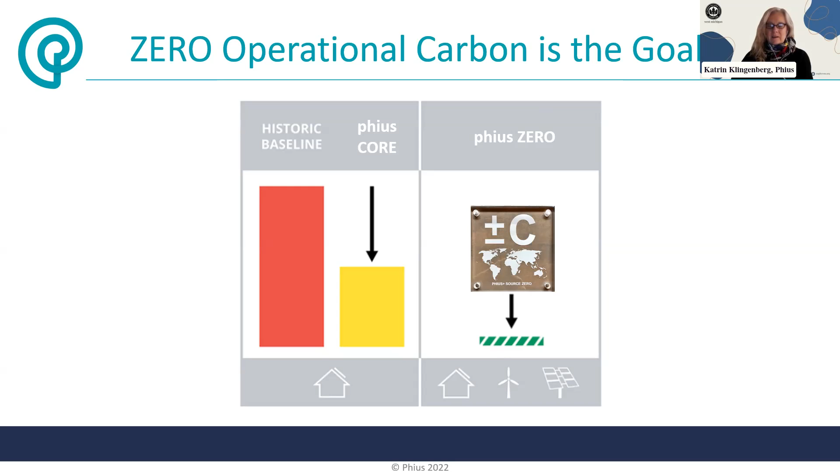So then under the Phius Zero certification program, we encourage you as the design team, obviously not just to go to zero, but the goal is to zero out the carbon. To do that, you'll probably have a safe kind of cushion in terms of sizing your renewable energy, and you essentially become positive energy and start drawing down carbon on that end as well. This little green stripy indicates you're actually overproducing.

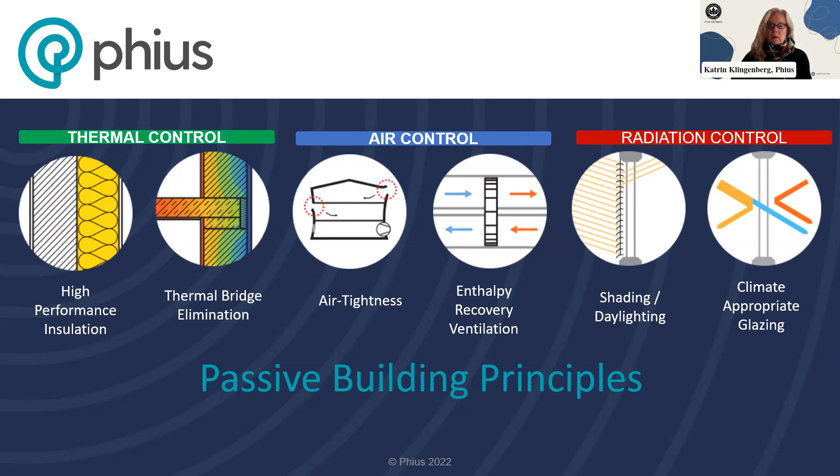And the passive building principles are pretty straightforward, this is not rocket science. This is thermal control for the envelope: insulation and thermal bridging need to be dealt with, air control so that we don't have any condensation in the wall assemblies. Cold climates like the one in Michigan, that's a real concern. Once you up your insulation levels, we want to build the building shell itself airtight, but then of course we need high quality ventilation with filtration, and also with energy recovery, and we have then radiation. Shading is very important, daylighting is important, and the performance of the window package is important, and that all depends on the climate that you're in.

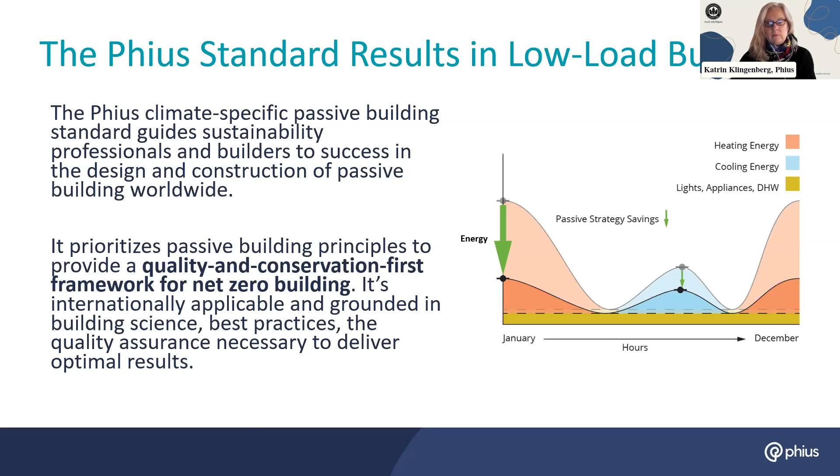So some of the additional upfront costs, especially in big buildings, is then significantly offset by the reduction of the mechanical system. And once we put all this in place, then we get a building that delivers all these wonderful benefits like comfort and healthy interiors, safety, resilience, durability, and long-term affordability.

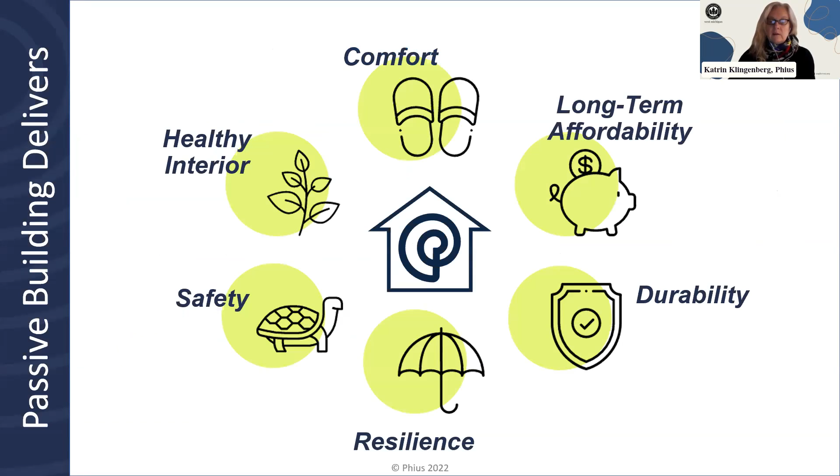So really kind of like pretty magic and not that hard to do. So let's hop into our certification process.

As I mentioned, we started working with the US Department quite a while back in developing our standards to cost optimize them, to incorporate very stringent QA/QC quality assurance during the construction process. And these are really all the energy programs in the US that do that in the way DOE says it should be done, including very stringent quality assurance on site as well, not just design certification.

So what's the difference between Zero Energy Ready Home and Phius Core and Phius Zero? Why is there differentiation? The Department of Energy decided Zero Energy Ready homes are cost effective, so they hold off on the envelope upgrades quite a bit earlier than we do, because they say there will be decarbonization in the grid, and that will be just fine and good enough. But in our opinion, this is actually not going to be enough, because we're already behind the curve on climate action, and buildings really want to go to zero because as climate change is already in effect, more and more attention is shifting to adaptation and resilience as well.

So to make your building really truly resilient, we actually envision cities to be built around this concept, combined with microgrids to further make the overall grid resilient as well.

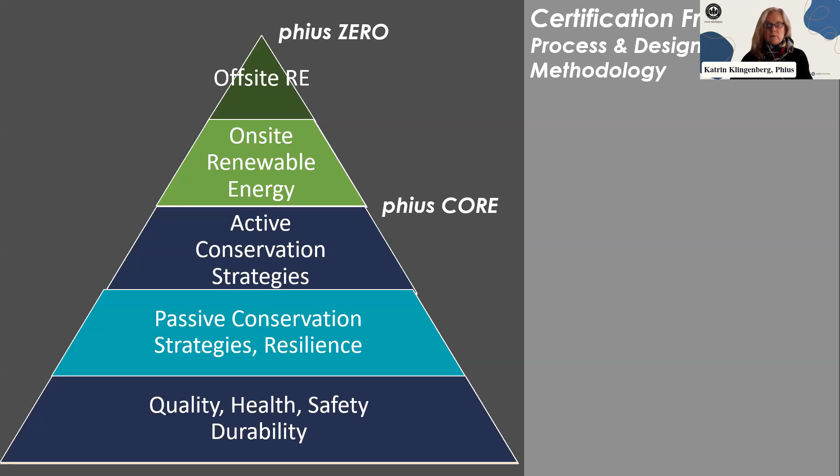And ILFI, for example, or LEED, they don't have that built in. You really should be doing this optimization process, because otherwise you're kind of reinventing the wheel. So going through the certification process with us is really going to help you streamline and make sure that you're hitting all the important points and that you actually meet the performance you're shooting for.

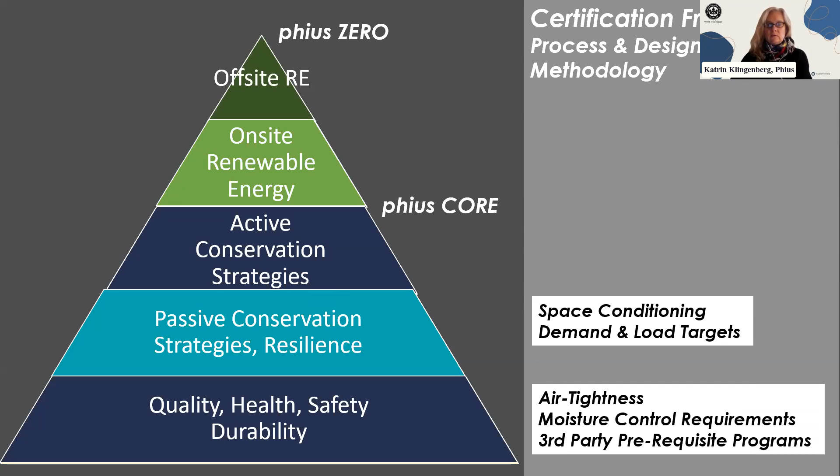So in the certification process, as I mentioned, quality, health, safety, durability is absolutely number one importance. And then on top of that, we lay out the passive conservation strategies to get to our resilience goals. And that means we can float through power outages, that's how good the envelope becomes. So snowfall in Michigan, maybe the power goes out, you can stay in your home.

And then after you put the passive conservation strategies in place, the next step is to optimize your active system. So you want to find electrification technology that is super efficient, like heat pumps with a very high COP, and that will get you to the level we expect for the Phius Core certification. Once you go above and beyond from there, that takes you to the Phius Zero certification. At that point, you're adding the appropriate amount of on-site renewable energy, but that's not always possible, so off-site renewable energy is also allowed under our certification process.

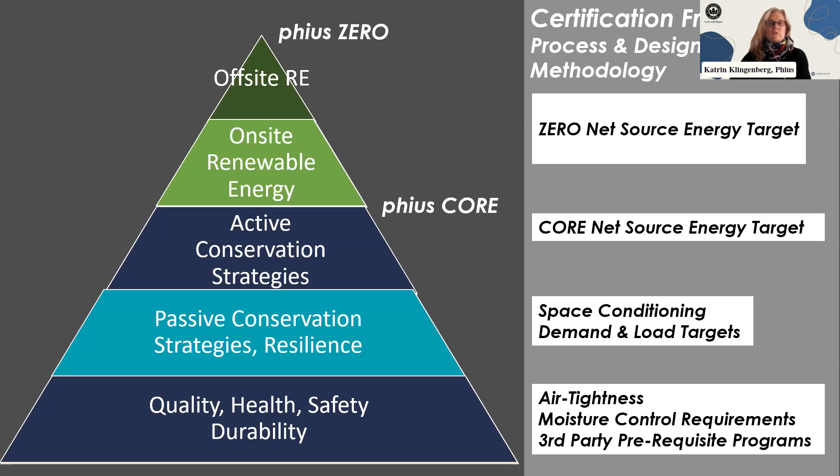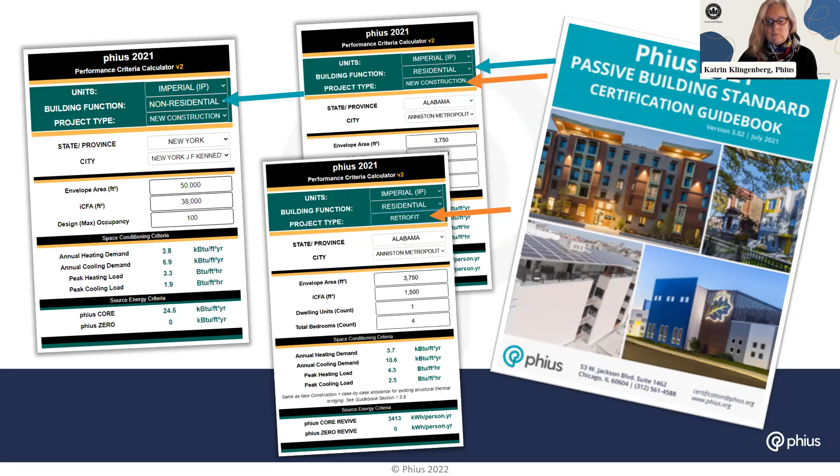So in this next one over here, the residential retrofit one, you can see that with a different size of building, these targets pretty significantly change. So this is very detailed and very optimized, and again, we're aiming to get you to the most cost-effective and most comfortable solution with this process.

Under 2021, we update our standards every 3 years because we basically have committed to the fact that climate is changing and costs are changing, and we want to hit the sweet spot.

That means we have to revisit our assumptions every 3 years, and we've done this ever since 2015. We're now on 2021, and you can see here that we're moving very clearly in the direction of zero energy and wholly electrified buildings.

For our Phius Zero certification, and we also recently came out with a Phius Core prescriptive where you don't have to do detailed energy modeling anymore. That makes it more cost effective and easier for people to do. It's basically just a checklist.

For those certifications, we're no longer allowing fossil fuel combustion. If you just go to essentially zero energy ready, the Phius Core level, at that point we're still allowing for combustion, but we ask you to consider that probably in the next 10 years you will want to electrify, because people will potentially decommission gas. So we ask for a plan so that electrification can be achieved easily later.

I'm going to check my time here real quick. I've got to speed up a little bit.

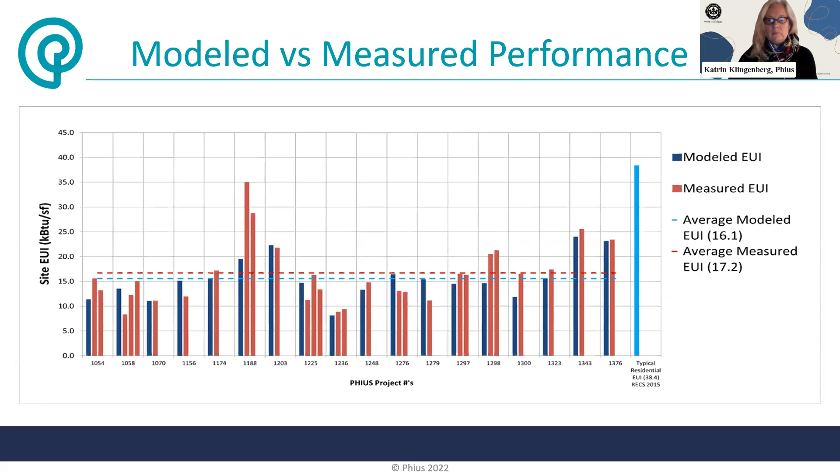Our measured results versus model performance are excellent. We're within ±7%, and we attribute that to very stringent quality assurance that I mentioned earlier during the construction process. And just a quick note on cost.

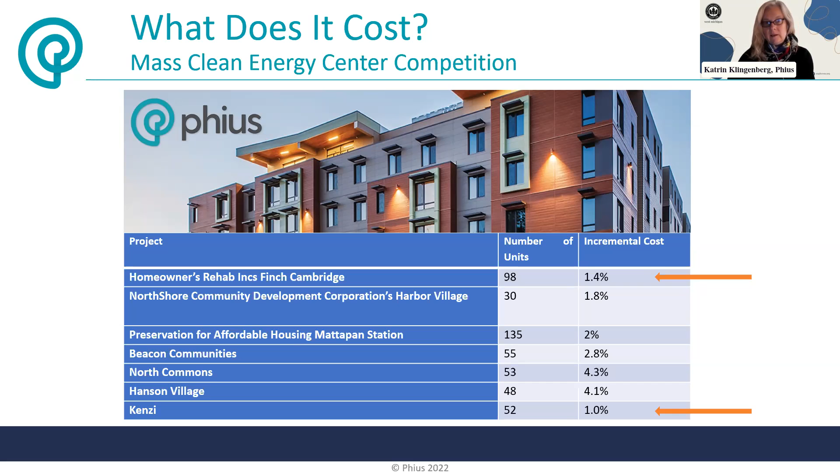And for a large multifamily building, at that point the developer really cannot afford not to do it. A lot of this is driven by affordable multifamily housing right now, because there's very hefty qualified allocation plan incentivization that's been written into 17 states across the country.

This is our largest to date fully certified project, an affordable 26-story project in the Bronx. We just had the big ribbon cutting, the governor was there, so pretty big deal. A very nice project, and there are many more to come in the near future.

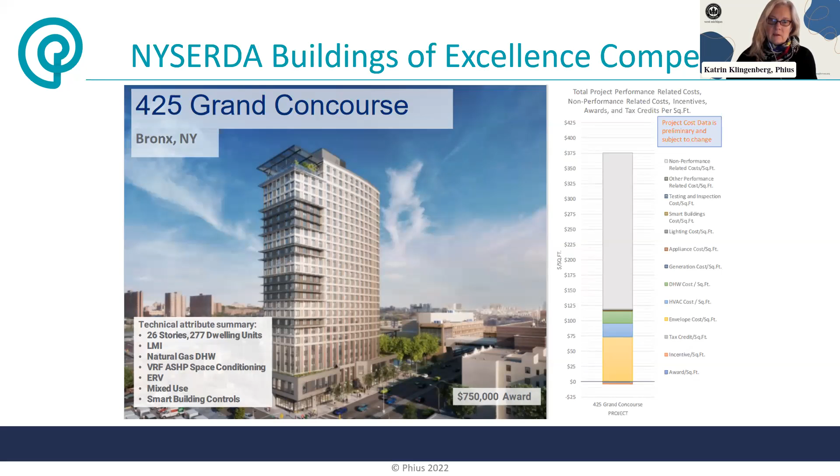Another one in the Bronx. In New York, they're really going for it.

Real quick, what we initially saw in single family homes in terms of detailing, air barrier, continuous insulation, and thermal bridge-free detailing, that translates really well to multifamily projects. It's not adding too much more cost.

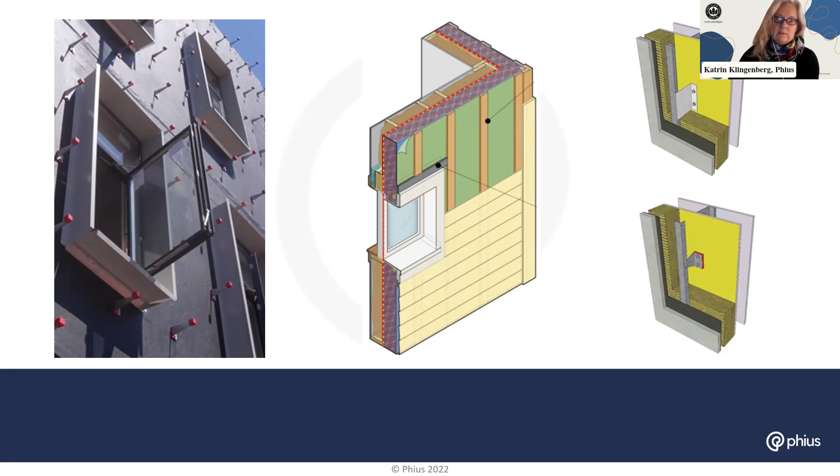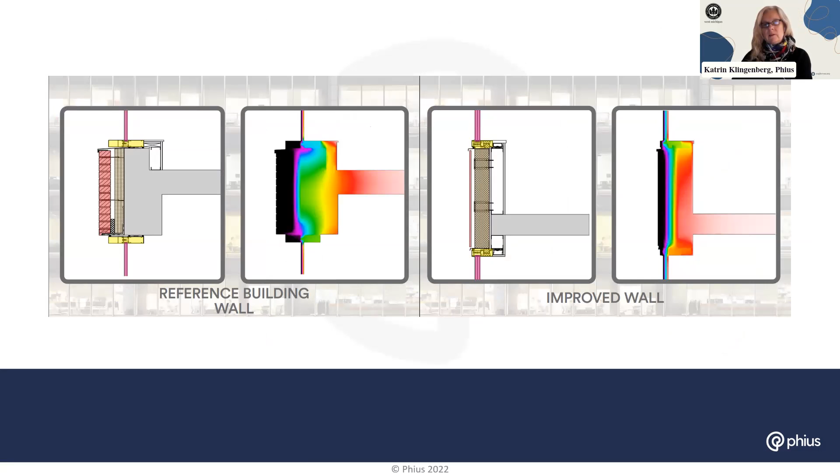And then also for commercial buildings, this is the detailing here, like a typical reference building wall for an office building in Chicago that was designed by Solomon Cordwell Buenz, and they improved the details on the right to meet Phius standards, and they did.

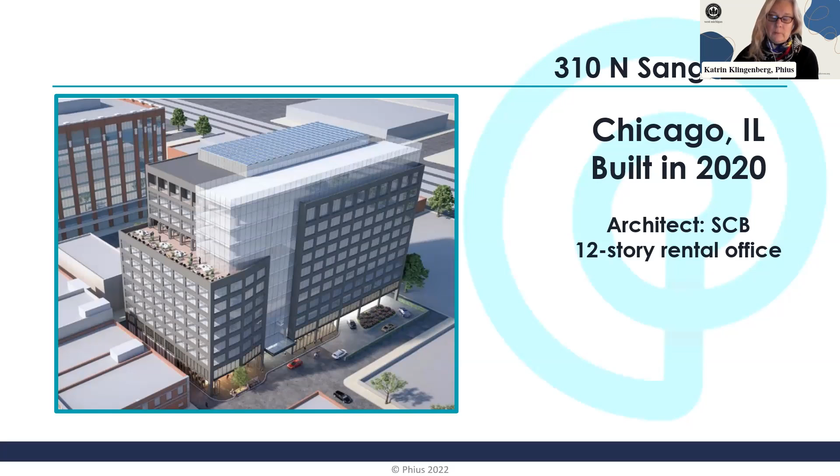And this is the project, Fulton Market. It's probably finished by now. Unfortunately, the developer sold it before it was done, and the new developer was not interested in paying for the certification, but they kept the details and the specs.

So once you do all these things, driving the point home on what the benefits are, it's not just the original high level performance benefits, but passive building also provides a whole bunch of benefits for owners and developers in terms of increased energy independence, decreased maintenance calls, and long-term investment. And for the tenants, you are guaranteed comfort, healthy indoor air quality, livable, resilient spaces during outages, and of course you get to benefit from super low energy bills.

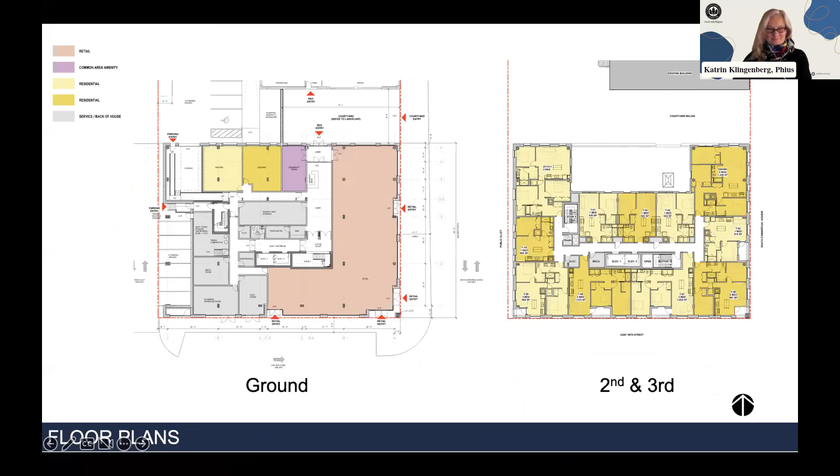All right, so thanks for including me. Can you all see that? Ooh, nice, lots of color, lots of images.

So I get to talk about the practice of the theory that Kat just laid out for you. I'm Doug Farr, president of Farr Associates. We're based in Chicago, though I'm a child of Detroit, Cass Tech grad, University of Michigan grad, so I feel like it's homecoming today. We've been at it for 30 years, and we do high performance buildings.

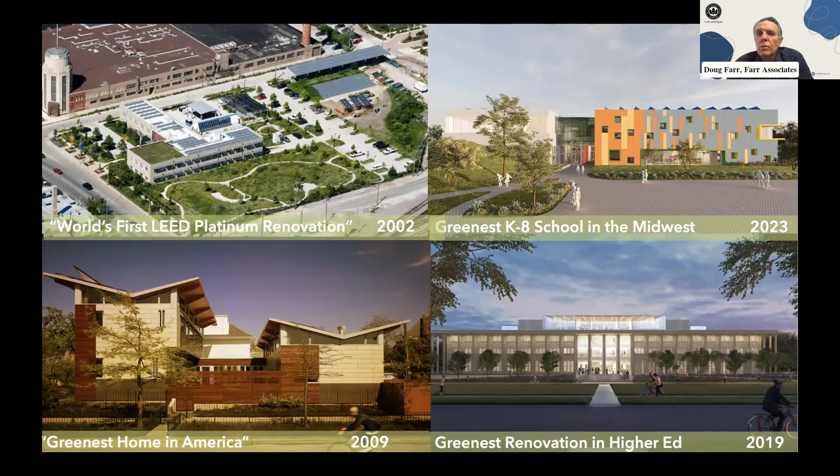Here's 4 of them that have special claims to fame, one of which is the upper right one, the Academy for Global Citizenship. I'll talk about it in a minute - it's the first project, I think, that's pursuing both the Living Building Challenge and Phius certification. So it's a really neat crossover project.

But anyway, we've been at this a long time. As Kat said, experience matters. And boy, I have gray hair from all this good stuff, but it's the work we want to do.

Including his development team, excepting me, it's pretty much an all-Black team. He sought us out for our expertise in green buildings and said, I want you to work with my chosen consultants, and they're all going to be newbies. We're going to really rely heavily, Doug, on your experience, because none of my team have green building experience.

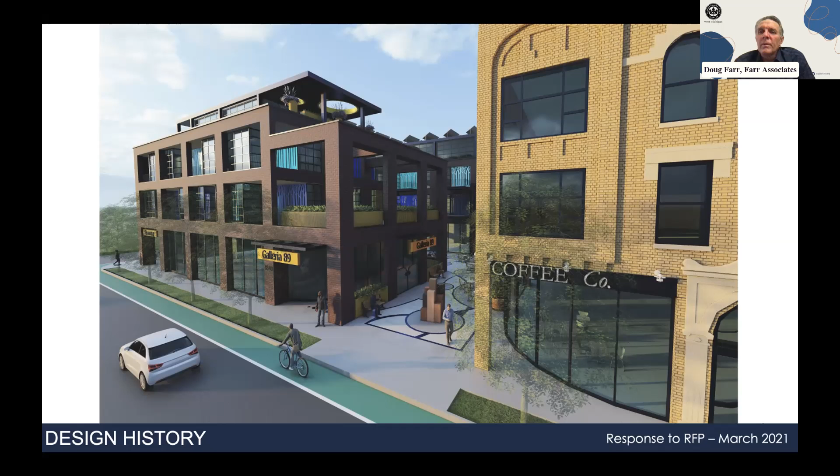Our collaborating architect, Ravetna Architects, wasn't happy with it, and before we got involved, went from this to this. It's sort of jarring when you put on a hat that's about all the things Katrin was talking about - thermal efficiency, minimizing thermal bridging in an envelope, getting the windows right and so on. Oh my gosh! The flying buttresses, the blue speckled brick, the lack of things that stack - it's just really kind of crazy. Hence, maybe why AJ asked us to come in.

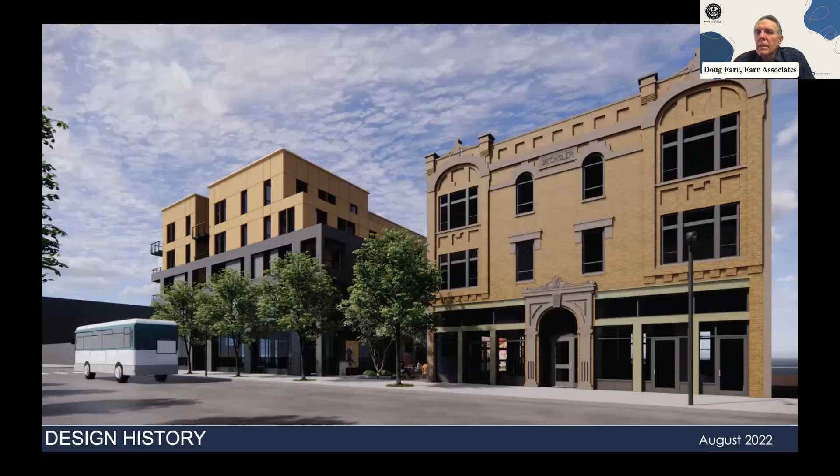So we turned that into that. There's a companion building to the right here, an existing historic building that will be retained and restored. What we composed here was a kind of top-bottom composition of the gold brick - the lower 3 levels of the building on the right, we reflected in the upper 2 levels of our building on the left.

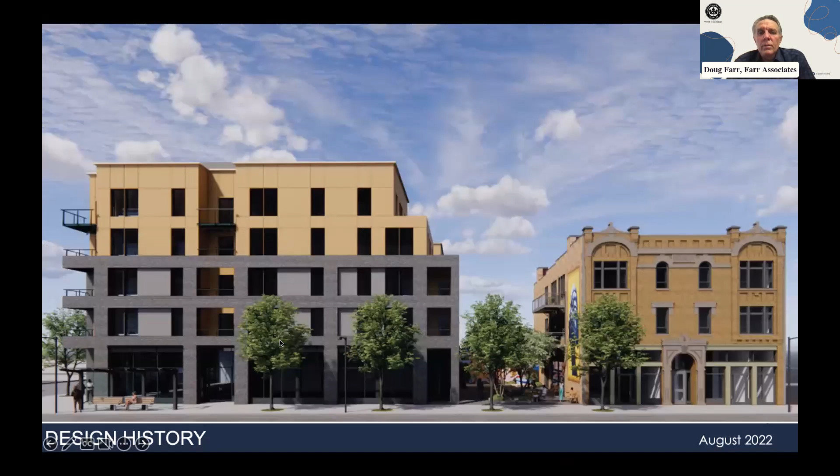So, a top-bottom strategy with a courtyard in between. We rationalized the stacked sugar cubes look of the last image into something that actually stacks, and rethought how to enclose this building in a Phius-like envelope while retaining the intentional masonry grid of the lower floors and the stepped balconies. Quite challenging. Here's another street view - you can see we worked hard to stack the balconies, which makes a lot more sense than having them random. I think we've got it worked out, and I'll walk you through some details.

For orientation, here's the new construction building and the ground floor plan. It faces two streets, 89th and Commercial. A large commercial tenant is proposed there, with two residential units on the lower ground floor, and upper floors are a U-shaped plan with a classic U-shaped corridor.

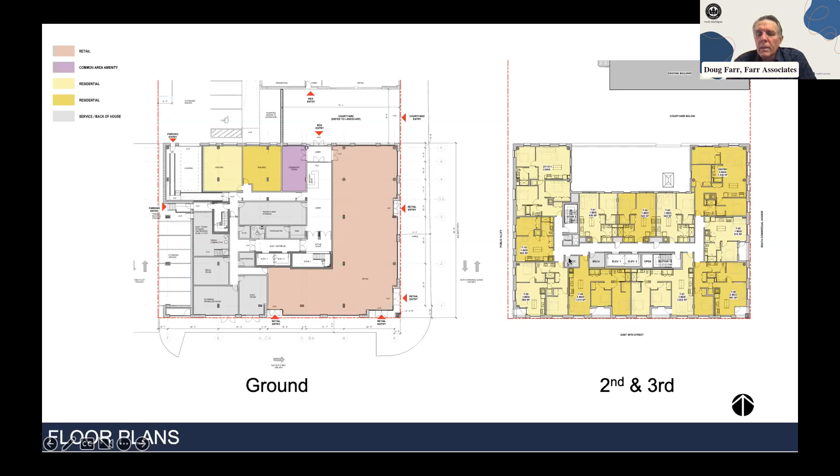The one thing we brought forward to AJ, our common bond, was a desire to reduce utility bills for low-income families - something he hadn't fully thought through, but we were able to give specifics to. This included improving health outcomes for lower income families by getting out of the business of cooking with gas, propane and methane burned in a living space, since most of that exhaust doesn't get drawn out even with an effective vent hood. So all that exhaust gas goes into our lungs and our children's lungs. Making the case for an all-electric building, including eliminating domestic cooking gas, was an easy sell.

There are stats from US EPA: indoor air is 2 to 5 times more polluted than outdoor air. I know our indoor air will be very high quality because of the stringent requirements of Passive House that require continuous outdoor mechanical ventilation. We expect to lower energy use by more than 50%, but the utility bill savings are around a third or 40%, because residents still have to pay monthly bills just to get a utility connection.

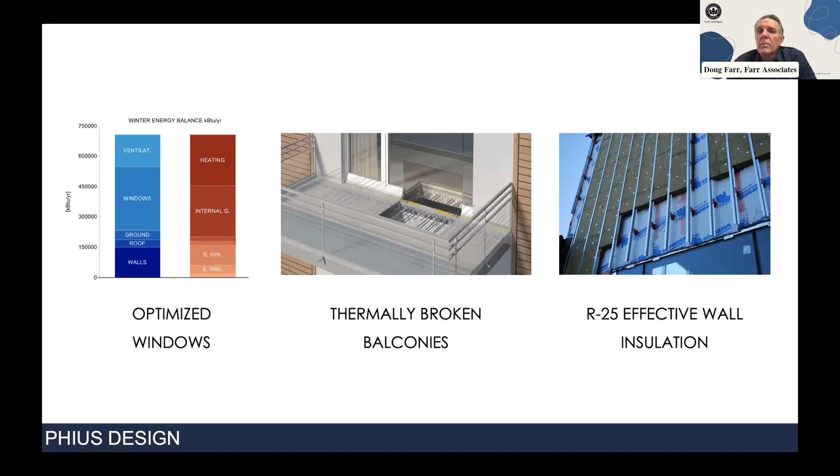At the time we proposed this, it was our understanding that this type of system, often called the Cascadia Clip system, had not been built in Chicago, so we were struggling to get decent pricing for it. In the four months from last November 2021 to March 2022, we heard from our general contractor that there were then three bidders, three projects circulating on the street bidding the same system. So Passive House had hit Chicago and hit it hard - it was out in the marketplace.

Here's a tool if you're interested in WUFI. As Katrin said, the staff is excellent and will offer, for a small fee, a feasibility study right up front. It gives a snapshot of where you are and what you'll likely have to do. This was guidance on whether we were thermally breaking the balconies or not, and how the performance would have to be across the whole building.

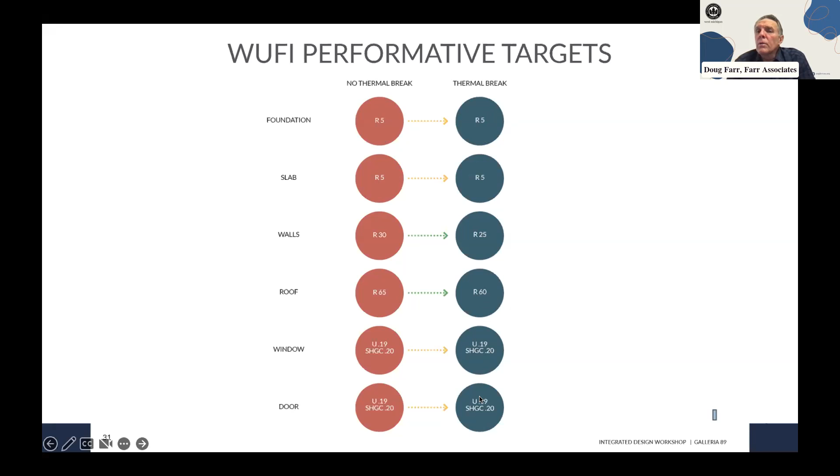What we found is that if we thermally broke the balconies, roughly speaking, we could simplify systems and thin walls and save lots of money across four or five buckets of specifications.

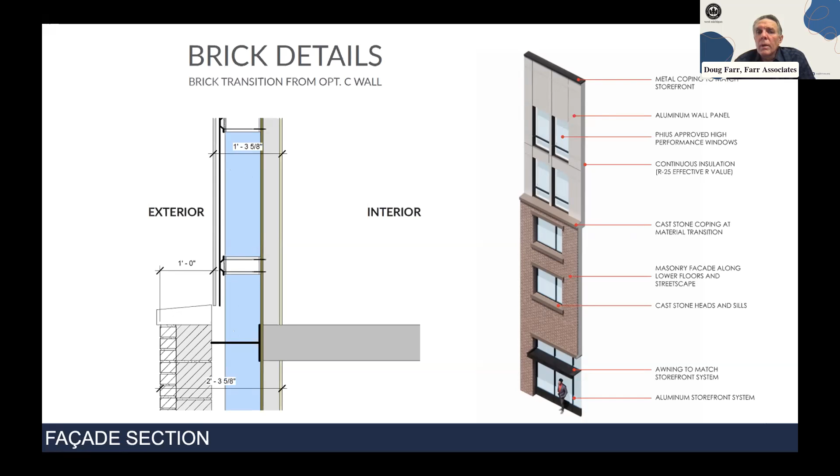As I mentioned, we inherited a design with a lower masonry grid, so we worked out a set of details. It's a concrete frame building with steel stud floor to floor, Cascadia clips, and continuous mineral wool insulation, with a freestanding masonry wall outboard of that, tied back occasionally. We've really minimized thermal bridging because the insulation is continuous from the top of the foundation right up to the parapet, interrupted only for windows. It's a really exemplary assembly.

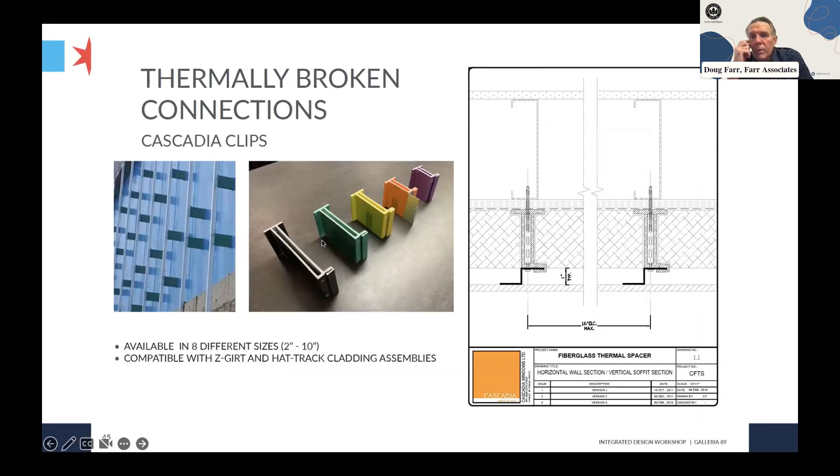Cascadia clips, here they come in differing depths and colors and so on. If you're not familiar with it, it's a neat thing to see. I can show you more about it.

In terms of cost premiums, here's a snapshot of where we've been. New construction in Chicago for mixed use, multi-story, multifamily is costing a lot, $360 to $380 a square foot. It's really ballooned coming out of COVID and the supply chain issues. But amidst that, one number I can point to is that achieving all the high quality performance characteristics of a Phius mechanical system is costing us about $4 per square foot on this project.

That's a little over 1%, just for the mechanical system. We also have an associated premium for the wall system I've shown you. We're guessing the construction premium all told is maybe 4 or 5% above what a code building would be. So it's not 10, it's not 20.

If you look at the return on investment over the years, it's good. Then think about a different economic principle called opportunity cost - we're all trained to think about return on investment and diminishing returns. So you say, stop spending money on insulation, you've already got 4 inches, you don't need 6 inches, stop spending because there's diminishing returns. That's one principle of economics.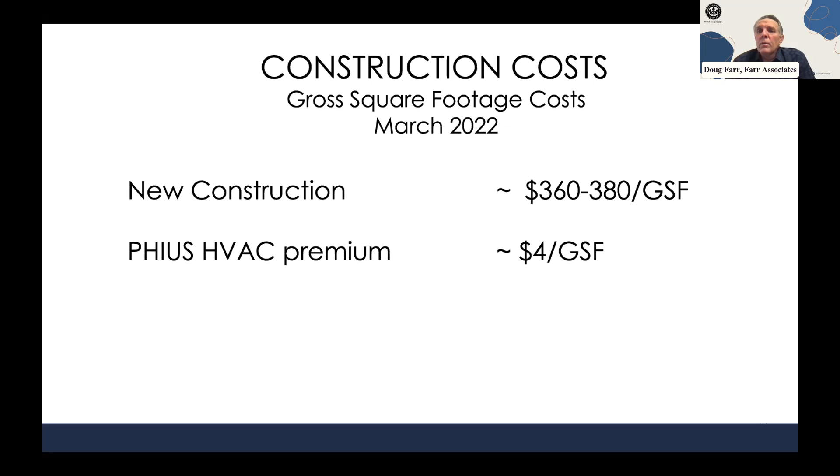Another principle I think is more valid when it comes to climate concerns in buildings is called opportunity cost. When are you actually going to come back and fix it if you got it wrong and only built 4 inches of insulation when you needed 6? What's the cost of coming back and doing it again? It's infinite - you really can't do it. So there's a kind of weighing of these considerations in the work we do.

Here's one example: I gave a non-Phius architect on my staff, a good architect, the task to design this building and give me a first facade. His first effort, on the left, was 44% glass. I said try again, see what you can do to simplify and reduce the glass. This is his second try. First try we got to 37%, second try 33%, and in the end we're a little under 30, in the upper 20s for facade glass.

The design of the facade really saves us money. Every square foot of glass we can replace with wall, we think is a cost savings - the contractors informed us of that. It improves energy performance and it improves the cost. I think it pushes our design, stresses our design muscles to work harder at facade composition, because it's easy to do a gridded facade that's mostly glass - we can do that in our sleep. Making a building beautiful with less glazing requires more effort and more talent.

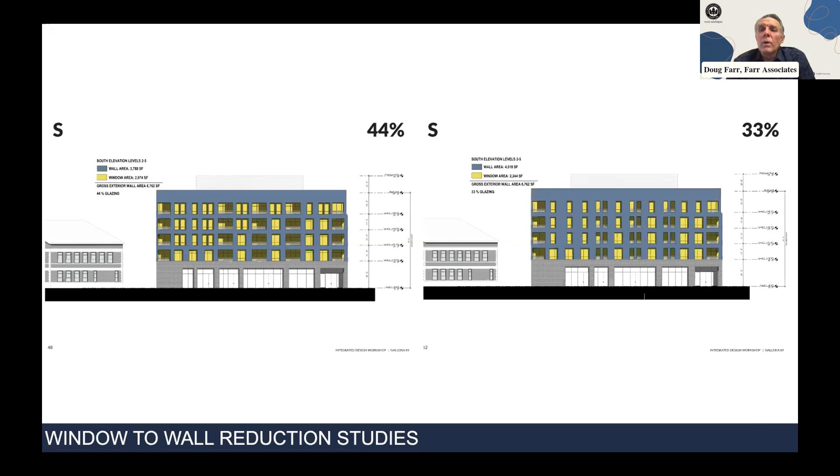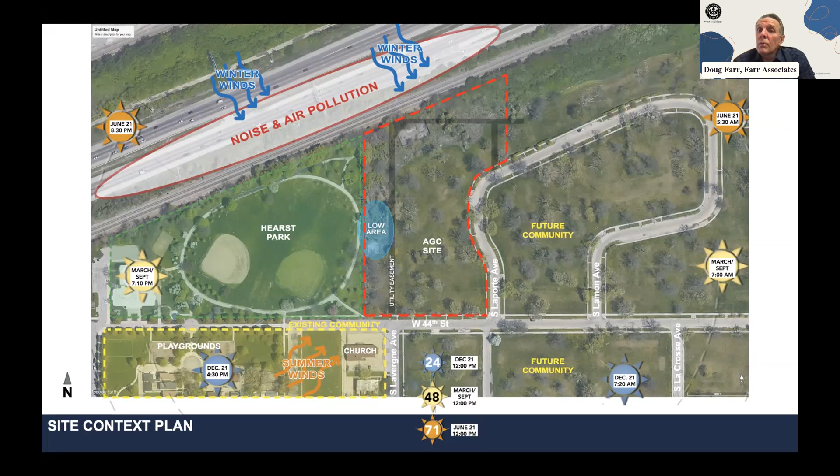So that's kind of where we are. The second project I wanted to talk about is the Academy for Global Citizenship. This is a kind of willy-nilly site plan, but basically it's on the southwest side of Chicago, halfway between the Loop and Midway Airport, on a 6-acre site. It will be Chicago's first full Living Building Challenge certified project, and it will also be Phius certified. So it's a very exciting crossover.

If you've heard of the term EUI, energy use intensity, it has a modeled EUI, projected EUI of 20 for just building operations, and then 26 when you add in the food service - all the energy that goes to cooking and washing dishes and so on. So 20 or 26, which places the building solidly in solar ready territory and also solidly in Phius territory.

I'll keep my comments short so we have time for discussion. When you think about how a building goes together, what fundamentally changed? On the Galleria project, I showed you how we want a wall with continuous insulation and minimal thermal bridging. We've accomplished that.

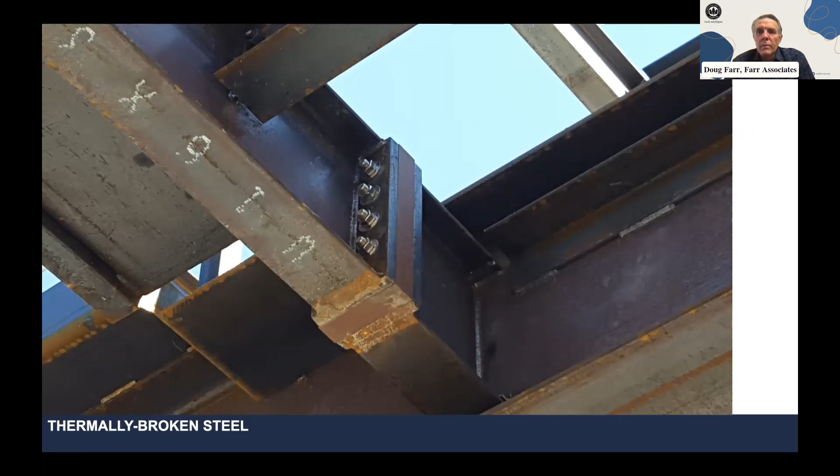But there it is, and the crews all want to see it, touch it. Is it really strong enough? What is that made of? All these kinds of things. So expect this level of structural break in your wall and structural assemblies where the structure penetrates through the exterior envelope.

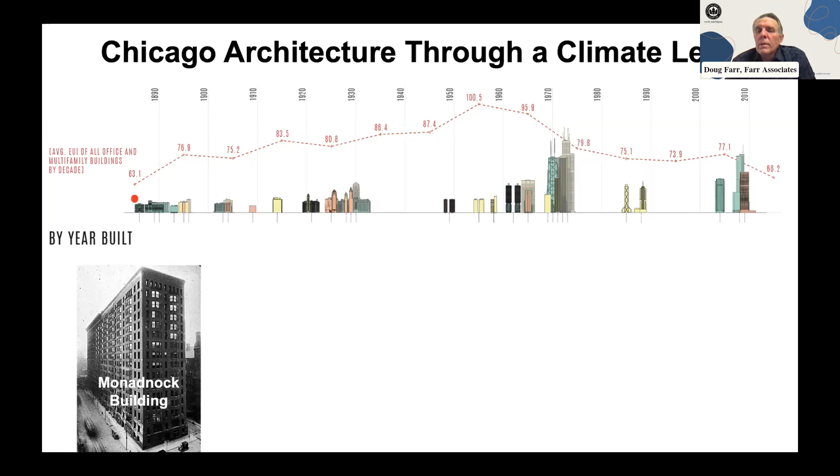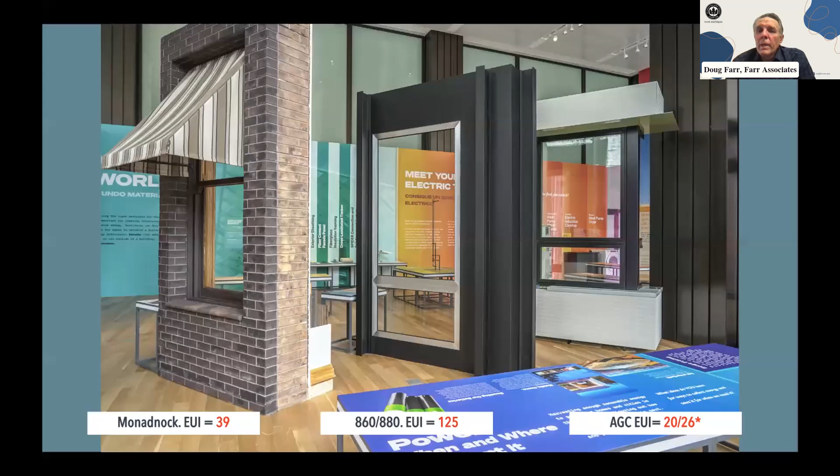So what we did was identify sort of iconic buildings from those earlier two periods of architecture, the skyscraper school and the glass box school, and we built full-scale mock-ups of those walls. If you come to the exhibit, we'll have a talk about why the energy use changed so much over the generations.

The third wall on the right, the white one, is a mock-up of the Academy for Global Citizenship. You can see John Root and Daniel Burnham on the left, Mies van der Rohe in the middle, and Farr Associates and Phius on the right. It's really instructive, and everybody that sees it agrees it's a very tactile exhibit where you get the lesson.

I think I'm done there, and I will stop sharing and look forward to the Q&A. Thank you.

Thank you both so much. Wow, I wrote a lot of notes during that one, and I appreciate you going through the detail of those buildings, really showing those renderings and the process you had to go through to change things up in phases, looking at all the thermal and energy information. I really appreciate that more specific information.

We had one question in the chat: what level of certification is the Academy for Global Citizenship project pursuing for both LBC and Phius?

For LBC, we're pursuing full LBC certification. For those familiar with the standard, there used to be LBC petal certification, where you could pick one of three: energy, water, or materials. It required you to do a number of things across the board, but you really focused on that.